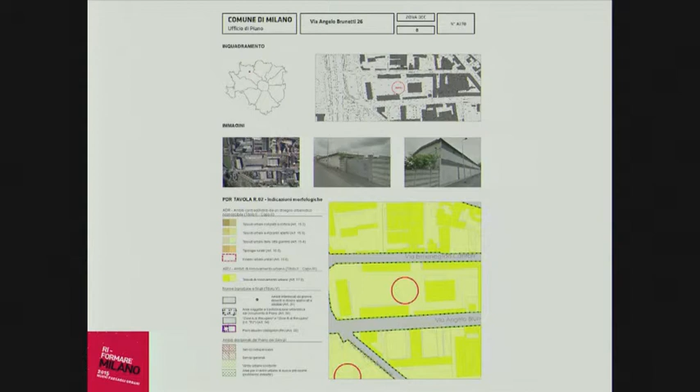The first one is the Via Brunetti environment, an area of urban reorganization. It is an area enclosed within an irregular block composed of constructed fragments of small autonomous buildings, more or less recent, that were constructed as the sum of parts. They don't define any mutual relation. The large central void, nowadays divided into car storage, a car breaker, and interstitial residual areas, seeks new internal and external connection.

We can see the previous slide with the municipality provision. The second area is a former parade ground, ex Piazza d'Armi.

It is a large urban void, and its history was connected to military use. Now it is surrounded and encircled by the city and by its fabric of decades of expansion. Today it is a precious void whose fate is uncertain.

The third one is San Cristoforo Rail Yard, an area of urban transformation. It belongs to the area of landscape redevelopment that sits alongside Naviglio Grande. The rail yard has a narrow and elongated shape towards the southwest. It is bordered on the north side by the active railway line Milano-Mortara, and on the south side by the line of water, Naviglio Grande.

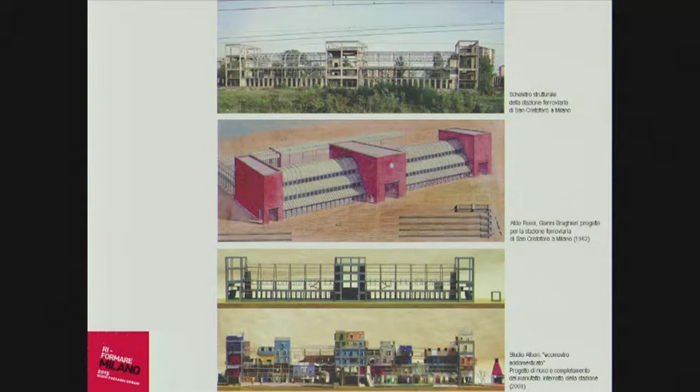Inside this wide area we can recognize the skeleton of the unfinished train station designed by Aldo Rossi and Gianni Braghieri. A recent project titled Domestication of an Eco Monster by Studio Albori has proposed the reuse of the unfinished structure, and Studio Albori kindly helped us in the research of the materials of the area.

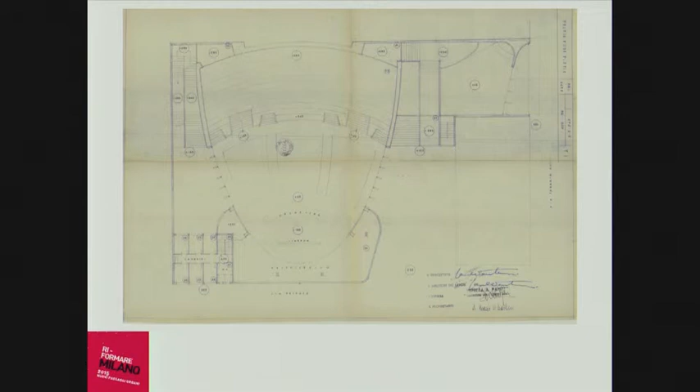The fifth area is ex-Cinema Adriano, built-up and open parcels. Through this work, we are also looking for the memory of punctual, smaller cases, for the history of small architecture, small portions that express a sense of belonging to the historical moment that made them. Here the architecture is present in the minor works, and the project can recognize their characters and reshape future conditions, revealing their identities.

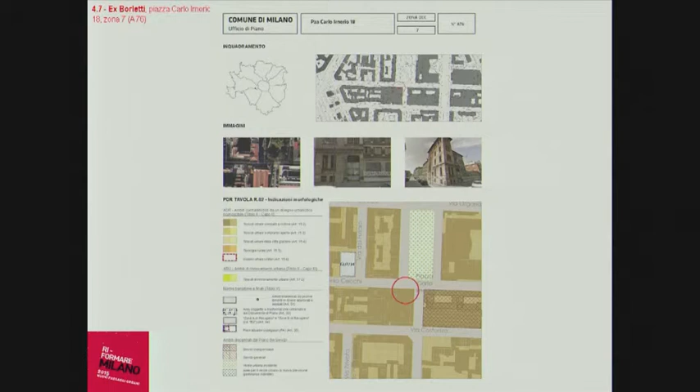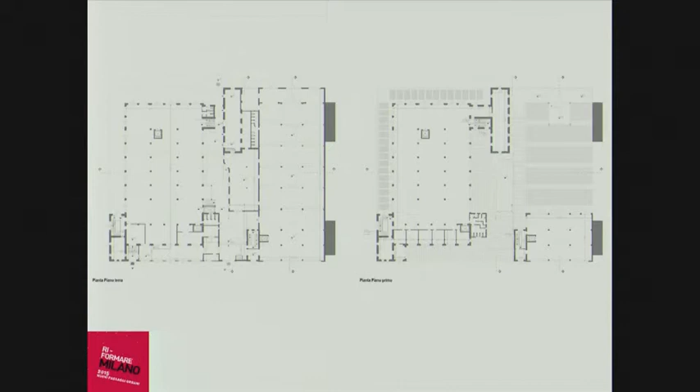Former Borletti, built-up and open parcels. It is the last part of the Borletti factory on Via Washington, waiting for a transformation. Borletti production belonged to the field of precision engineering. The Liberty Building facing Piazza Imerio is today abandoned, but we can still consider it a fragment of the memory of the industrial Milan of the 20th century.

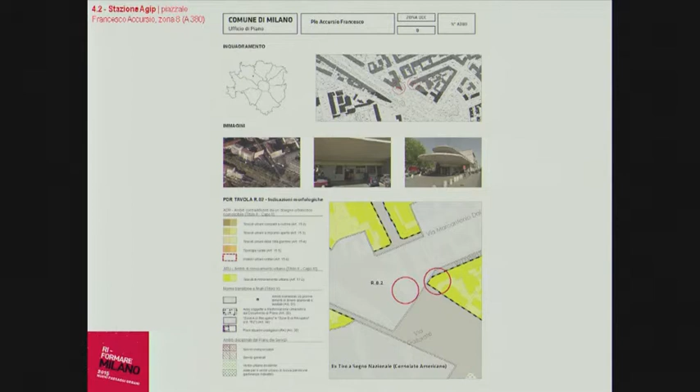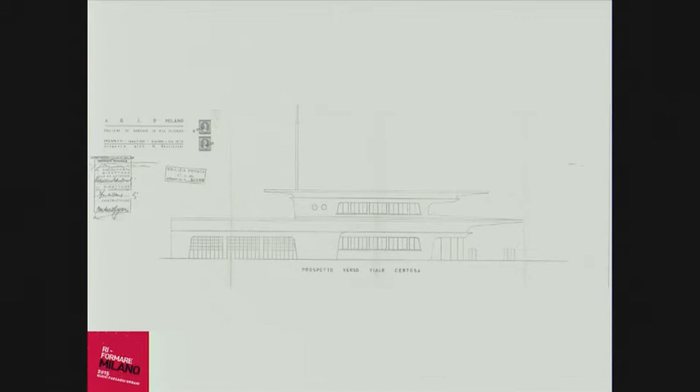Agip gas station is a building that has remarkable architectural interest. It is placed at the corner between Viale Certosa and Viale Spinasse. Its project was developed by architect Mario Bacciocchi in 1951. It was one of the first architectural designs for the gas station model, later standardized, of the Eni oil company. The building has a highly plastic image, and it appears unusual within the anonymous urban context.

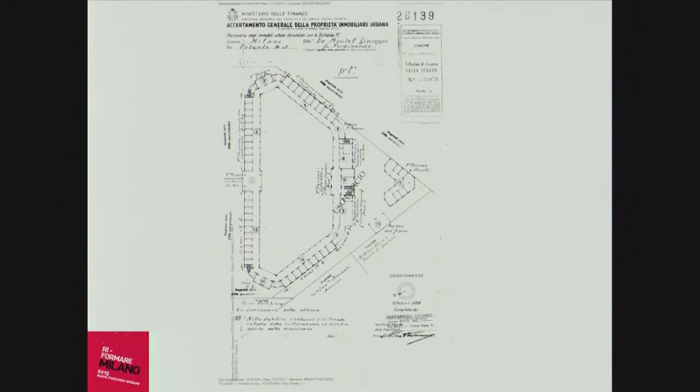The last one is the De Montel horse stables in San Siro. The stables were built starting from 1920 and were finished in 3 years. The San Siro football stadium was built later, and the site was, at that time, a wide expanse of lawns where horses were running and trained. It appears today as a place full of contradiction and contrasts, since after the Second World War, horse racing has been replaced by football, and the horse stables have been abandoned and looted.